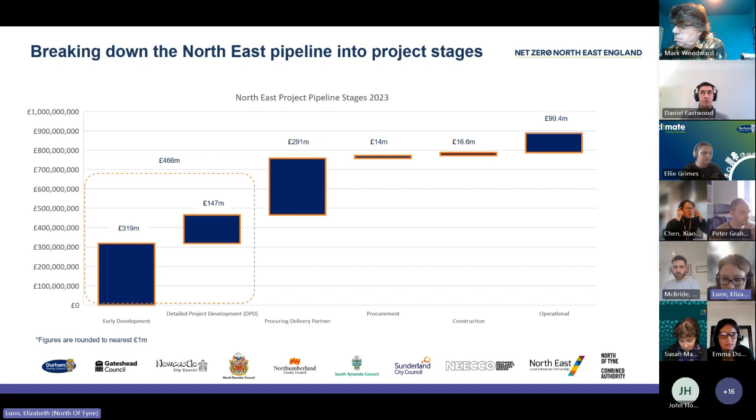I think I'll wrap up there because I'm aware we don't have much more time. But if you have any questions, I've kind of rattled through what's going on in heat networks in the North East or any of the hubs programmes - I would encourage you to get in touch. So without further ado, I will pass you on to Chris McBride, who's going to talk to you about the heat network zoning consultation. Thank you, Elizabeth.

I'm going to make an assumption that everyone on this call knows what we're talking about when we talk about heat networks, but zoning is the bit we need to fill the gaps in on. It's important to set the context: heating is responsible for about 20% of the UK's greenhouse gas emissions. Meeting our legally binding net zero targets will require decarbonising virtually all heat in buildings, so it's something everyone is going to need to consider at one point or another. Heat networks are an essential part of delivering that, especially in urban areas, but not necessarily exclusively.

Zoning is one of the main levers we've got to accelerate the growth of heat networks. At the moment they probably provide about 3% of heat, and we want to get that up to about 20% in total.

But the first thing to say about zoning is that no one actually has to do anything now, with the exception of replying to the consultation if you have the time and would like to. Our ambition is to introduce zoning by 2025. This is about getting ready for zoning and thinking about what it might mean for you and your local organisations, authorities, neighbours, and organisations within your areas.

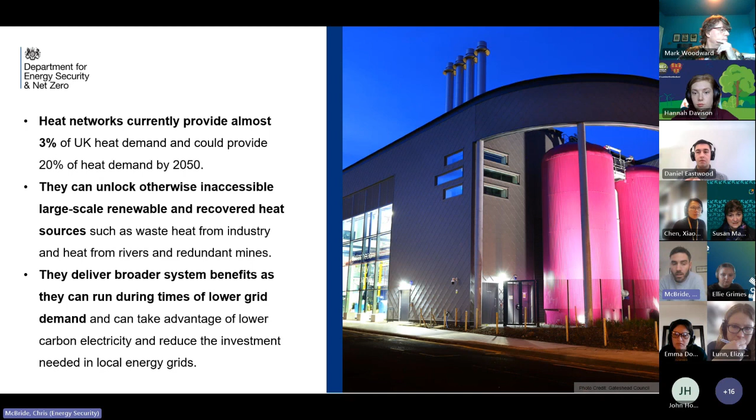Hopefully this provides a good introduction to what it is we're trying to do through zoning, but then also more specifically on the consultation, if there are things within the consultation that you would particularly like to respond to.

The thing to say about zoning is that it will transform how heat networks are developed in England - this is an England-only policy, which I guess is not of huge relevance to everyone on this call, but just to say, we're just talking about England, and the consultation is just relevant to England.

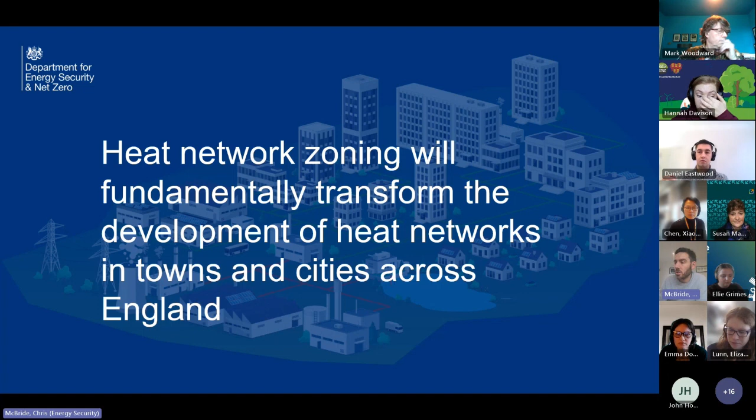Fundamentally, zoning aims to mitigate existing risks related to building and operating heat networks, and you can pretty much break those up into 3 boxes. The first one is it's difficult to make decisions about where to build heat networks in the first place.

So the aim of zoning is to designate areas where heat networks are expected to provide that lowest cost, low carbon heat. This provides everyone within that area much greater certainty that heat networks are the best choice for decarbonising heating there—whether you're a building owner within that zone, the local authority which the zone is within, or a developer looking to develop a zone. It's basically trying to give that much greater clarity to everyone involved.

Secondly, there's some uncertainty about the roles and responsibilities of different organisations in developing heat networks. Again, zoning aims to bring greater clarity on those roles and responsibilities, both at a national and a local level. Hopefully that can allow for better long-term planning, better coordination, and a faster rollout, and hopefully lower costs for everyone.

And then finally, there's uncertainty about whether buildings will actually connect to heat networks. You could design the most brilliantly connected heat network, mapped out in the most strategic way, but if there's uncertainty about whether buildings are actually going to connect or not, this can obviously hamper investment. It can mean that maybe the network isn't built out to that plan. So zoning can actually require certain types of buildings to connect to a heat network where it's cost effective for them to do so.

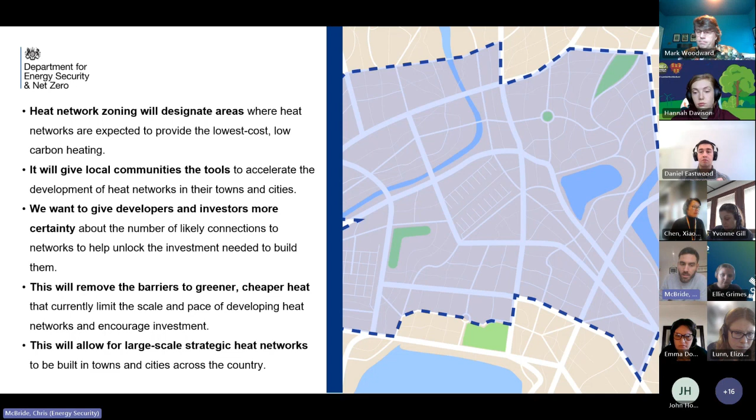And I'll go into this in more detail at the back end of the presentation. By requiring those connections, we're hoping it can help unlock scale and new opportunities, but also give that balance—as I said, it's about where it's cost effective for buildings to do so. So hopefully taken together, all of those things should help reduce the barriers that currently exist to developing heat networks.

So in terms of how we're delivering zoning, last year the Energy Bill became the Energy Act, and there were 2 big heat network measures within that bill. The first one was on consumer protection.

Through the Energy Act, Ofgem are going to be appointed as the heat network regulator, and from 2025 they're going to be able to step in on disproportionate pricing, bad customer service, and poor reliability. Last year we consulted on the finer detail of those proposals, and we'll be publishing our response to that later this year. So this is a whole new generation, essentially, of heat network regulation and consumer protection.

What we're currently consulting on is the finer detail of zoning. Zoning was the other thing that was in the Energy Act—that was the powers to make zoning a reality. This consultation is again about that finer detail: what does zoning actually look like in reality? And in terms of how it will be delivered on the ground, zoning is going to be overseen by 2 new types of bodies.

On one hand, there is some national coordination that is obviously required, so we're proposing the creation of a central authority that, to begin with, will be in the Department for Energy Security and Net Zero. But there will also be zone coordinators in different parts of the country who are basically taking forward that local delivery. I'm going to touch on that in slightly more detail, but this is really about trying to give local areas and local communities the power and the ability to make the decisions about what is right to be delivered in their areas.

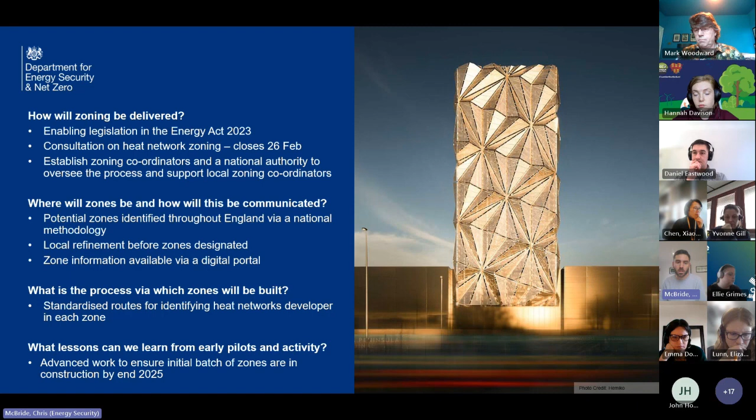As I said, it's indicative, it's not finalised, but hopefully it gives a decent idea of where we expect the zones to be. The final model, which we will release ahead of all the regulations going live, will go through an appropriate quality assurance process, because we want everyone to have confidence in this model and understand how it reaches its conclusions. So when it goes to the local refinement section, there's confidence in what it's doing, and that process can be as effective as possible.

So I mentioned the consultation. We're consulting right now on this finer detail. We consulted back in 2021, as people might remember if they were working on this then, and that was on the general principles of zoning that fed into what became the Energy Act.

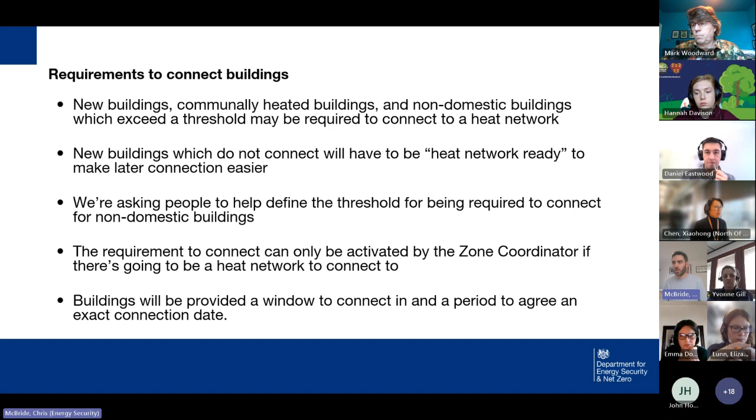So in the consultation, it sets out a timeline of when that requirement can be activated, what the process is then for negotiations between the buildings and the developer about the connection, and what the buffer period might be in which further information can be sought or an appeal might be set out. We want to make sure that's a process that works for everyone, and we're consulting on what that period should look like and how that connection date can be agreed.

Now, within this process, buildings can seek exemptions to connect. There are a number of different types of exemptions, and all exemptions will have an end date. They'll either be temporary, with a specified end date, or conditional, where the exemption exists until a condition changes.

These exemptions can be granted for either cost or timing reasons. For example, if the building owner deems that the connection is too expensive, that could be a potential exemption. If there is an existing contract in place that means the connection wouldn't work for timing reasons, that's another reason an exemption might be sought.

Some buildings might receive automatic exemptions from the central authority, and those are likely more than anything to be for national security reasons. All of the finer detail of the exemptions, which I don't necessarily have time to get into now, will be set out in the consultation.

I appreciate that was a very quick run through for what is quite a large topic with a lot of detail, but hopefully it sets the context for what we're trying to do through heat network zoning. I'd stress the consultation is live right now, and it closes on the 26th of February. If you would like to respond to it and you are able to, please do not feel you have to answer every single question in the consultation.

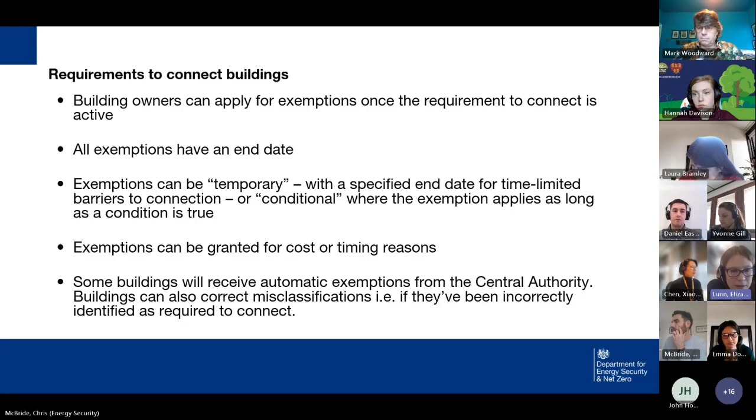Good morning, everyone. Thanks, Lizzie. I'm going to try presenting Teams if it will work. If not, we'll defer to not being able to see everyone. Let us know when they're coming through. Yeah, that's up now, Graham. Peter, sorry. Okay? Yeah, awesome. I made it so I can read them as well. Might help.

Yeah, so I'll skim through this because a lot of it's probably covered and people know. So heat network zones were announced to be delivered by 2025 in the Energy White Paper, and the primary legislation now exists within the Energy Act as of October last year, and secondary legislation is what we've just been talking about there for the consultation.

So the definition is basically the lowest cost means of providing decarbonised heat. And we've been one of 28 cities working with DESNZ and our appointed zoning technical consultants during 2022 and 2023, as various work packages were added onto that.

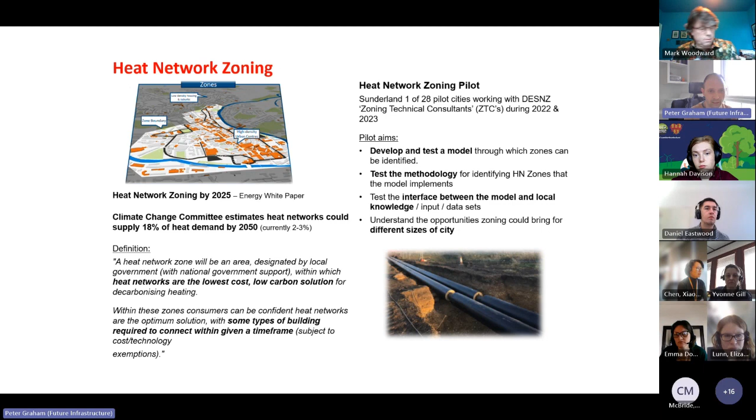And then using local authority knowledge to understand how areas might develop out, through development plans or anything like that, and use of buildings, because initial computer trawls might show up a large scale building as having a significant heat demand, where with local knowledge or use of that building, that might prove otherwise.

So our zoning technical consultants appointed by DESNZ was WSP. So they also were supporting us and continue to support us on Sunderland City Centre Heat Network, which is now known as Sunderland Central, as a result of the outputs through this work.

So they managed to support us in getting Green Heat Network Fund Transition Scheme funding for commercialisation and pilot boreholes. For various reasons I'm not going to go into, we still haven't drilled the boreholes, but most of that's just down to cost and the depth we're going to. But that's a work in progress, with discussions with DESNZ and various bits of market testing ongoing.

So the bit you're probably more interested in today is around the approach we took to the heat network zoning pilot. So the approach with WSP was very much a GIS model based approach. And as was just touched on earlier, it didn't just stop at the boundary.

We kind of did administrative boundary plus, because there are some development areas that would cut across that. And we've spoken to neighbouring local authorities, and they've had some insight as to what those zones might look like, where they're touching the boundaries.

So there was an initial THERMOS output, and the level which we drew for that was an assessment at 80 megawatt hours, just to give a little bit of leeway. What's been discussed within the zone is 100 megawatt hours plus would be the sort of mandated load for public sector buildings, any communal buildings, and then we also added in large scale development areas into that.

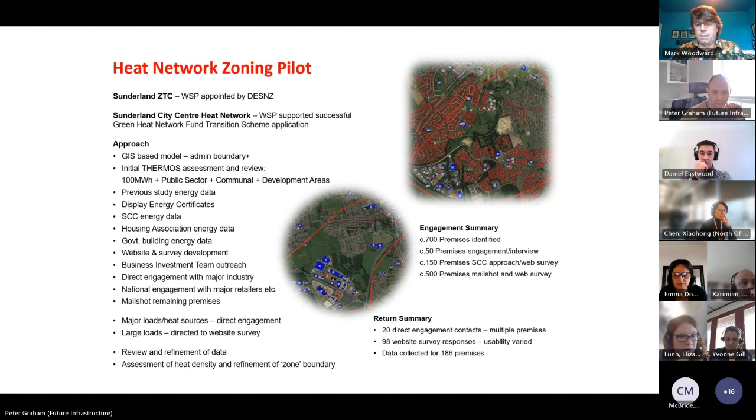In the output summary for Sunderland, we ended up with 16 individual identified zones, some of which could be combined across road networks. Around 630 mandated connections - I think all in, buildings if they were to connect covers around 17,000 individual buildings if they were looking to connect later. The loads speak for themselves, as do the CapEx figures, which obviously we wouldn't be able to deliver as a local authority - it definitely requires private investment to deliver at this scale.

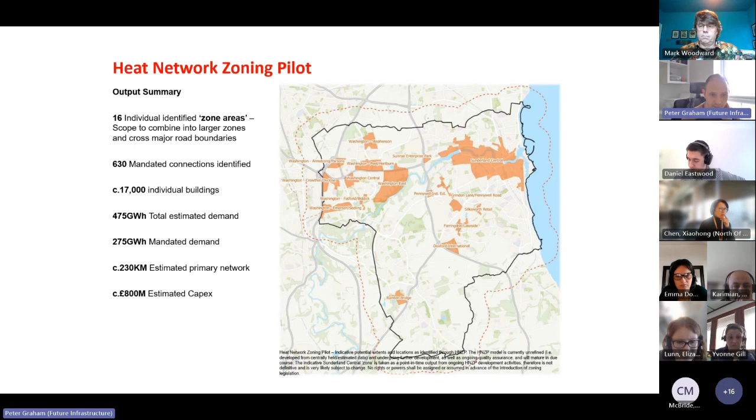What we are moving forward with is we're currently looking to market Sunderland Central as a zone ahead of zoning legislation coming in, for a network operator to come and work with us to commercialise that.

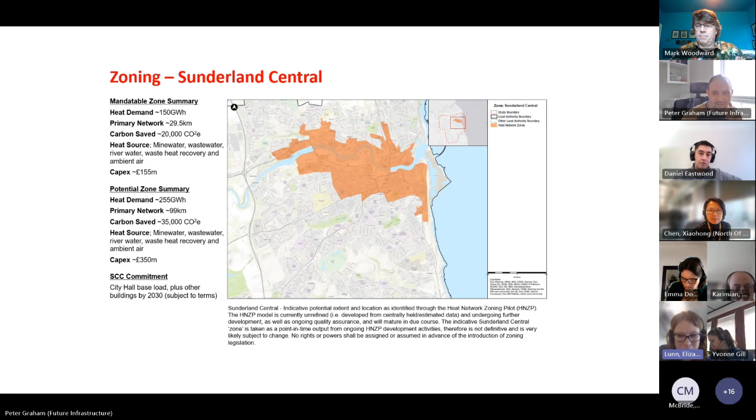So I'll leave it there for running out of time. That's great, so sorry Peter. No, that's all right. There's a lot - I think it's really interesting, and I think people will have lots of questions about it.

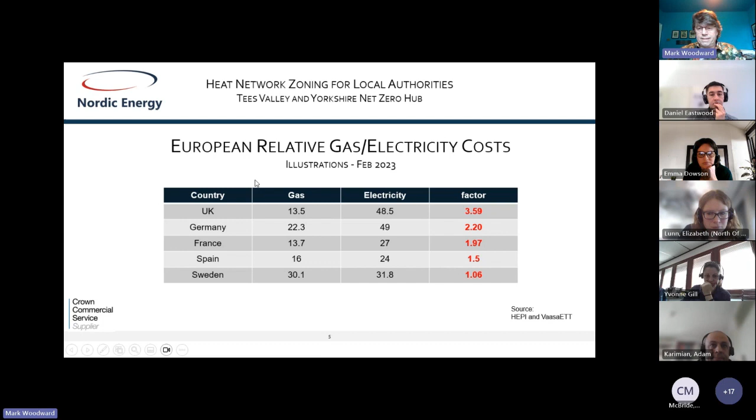And so when you're doing a business case, I've been doing this for a long time - any business case you look at, they say it doesn't work. So this is why mandation is so important, or 'required to connect' is the new terminology and so on.

As Chris has talked about, the government policy is moving in this direction. This is a revolutionary change - zoning. People are going to have to connect to a network. This is under a Tory government, remember, that is libertarian in its instincts. And it's moving in this direction.

The Energy Act itself covers an awful lot of territory, as well as heat network zoning - vitally important. The Energy Act went through Parliament, 3rd reading in September - Labour and Lib Dem did not oppose. There were 19 people who objected - John Redwood and people very much on the libertarian side of the Tories. Otherwise, the rest of the MPs. So this is not going to change with a change of government this year or beginning of next year. This is something for real because everyone's behind it.

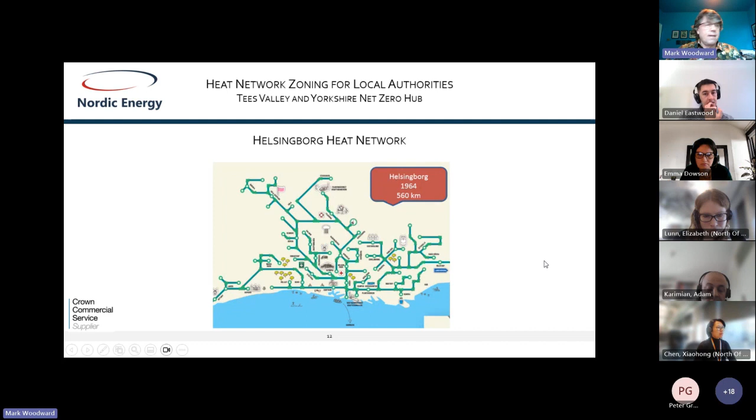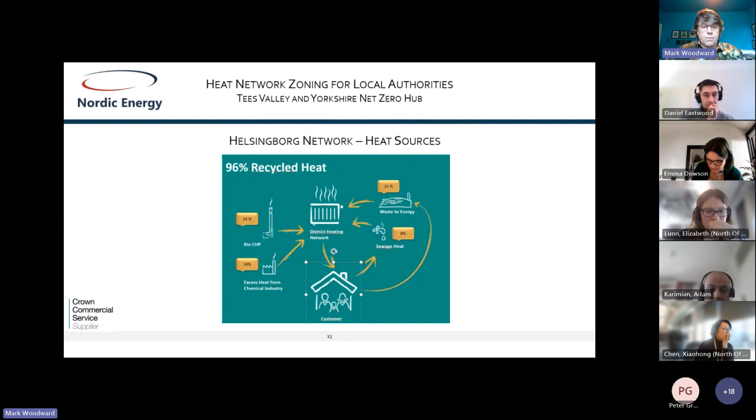I just wanted to do a little bit on what can be achieved, because this is not a fantasy land. In Helsingborg, their network is actually about 560 kilometers long now. It uses multiple sources of heat because all you're doing is circulating water pipes - you can make heat from anywhere. The biggest producer of heat for the network is Kemira, who makes sulfuric acid.

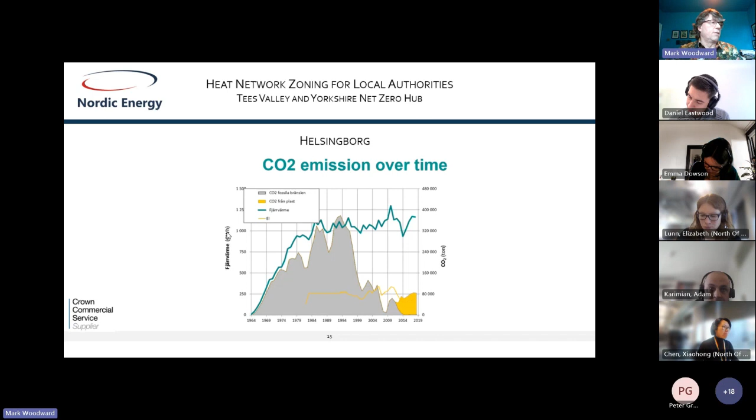If you look at our region, we make loads of stuff, and we're still manufacturing. We have lots of waste heat, we're not using it. And Helsingborg's decarbonised itself - it started this 20 years ago, 50 years ago, more than 50 years ago, at the last energy crisis. They were oil dependent, and they realised they were in a big hole because of it. We're in the same hole now, and that's what all this is about.

And from a public sector, particularly side, all those energy assets are owned by the municipality, and they built those up over the last 50 years.

It was actually offered to the market in 2019, because obviously you imagine a local authority with 1.15 billion's worth of assets that it's got to manage from an energy perspective. It makes them a bit scared. However, the community said, hold on a minute, we're not too sure about this. They had a referendum when more than 50% turned out, and 96.4% said no. Because their jobs depend upon the network, their jobs at Kemira, the sulfuric acid factory, and so on. If we're looking at it from an LA perspective, this is really important stuff in terms of economic growth, regeneration. It's not just about heat networks.

So yes, as Chris was talking about, that's where the current market position is, and that's the investment estimation coming in to achieve that. And we're seeing it happening. We're seeing it happening in Sheffield. A bit of a heads up on that.

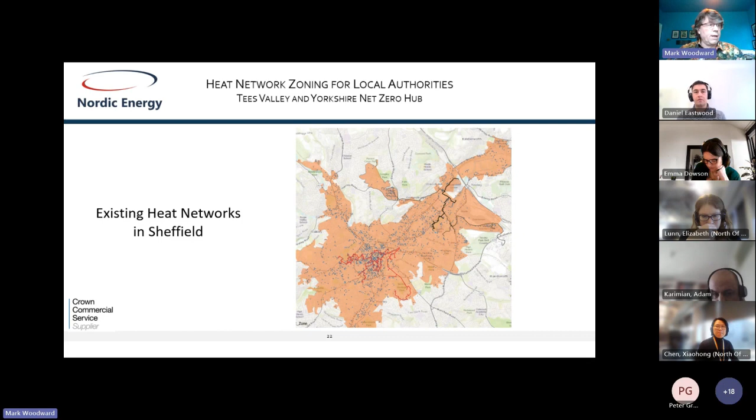We've actually, fortunately, got, rather like Sunderland, 2 networks in the city. The red one is from Veolia, started 70 years ago. The black one in the north is based at E.ON, different sources, but both have got expansion plans and potential for doing full-scale zoning, zone completing opportunities. And then heat supply, point I was just making.

And coming back to Helsingborg, little case study. Alfa Laval did the heat recovery work on Kemira. It cost 4 million, and they get 2 million worth of heat sales a year. That's a pretty simple payback situation, because this is not simple. Who's going to pay for the connection, who's going to put the heat exchangers in for the heat supply people, those opportunities? That's what the steel people say to me in Sheffield. Yeah, it's all very well, you know, Industrial Innovate UK and so on, things like that, Industrial Energy Transformation Fund.

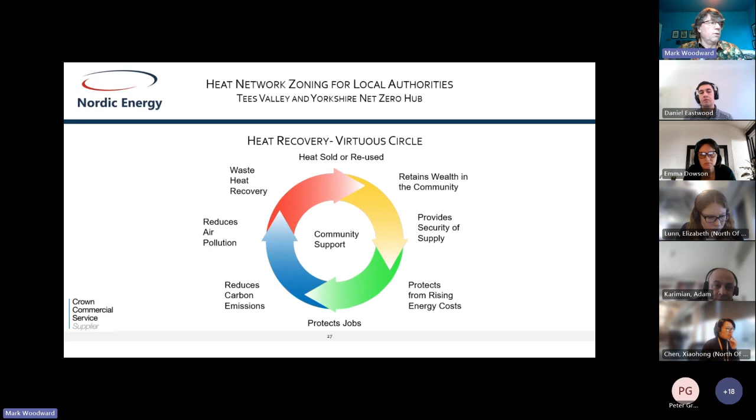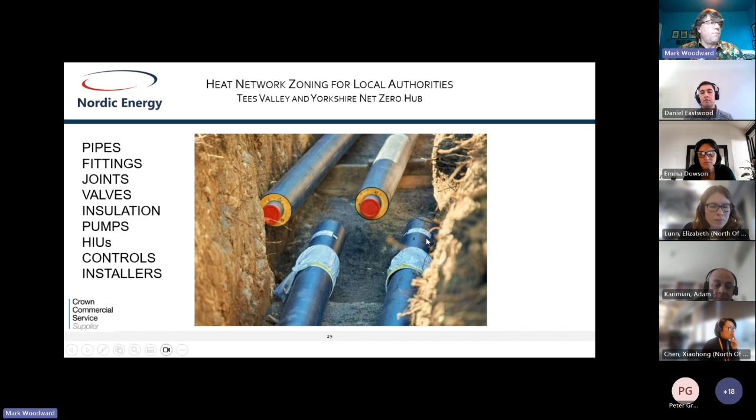But really, big expenditure, but look at the opportunity, and it's a virtuous circle, all of that. And then supply chain. Yeah, we make lots of stuff as well. We're not just sources of manufacturing, we make lots of stuff. What about the opportunity for integrating those?

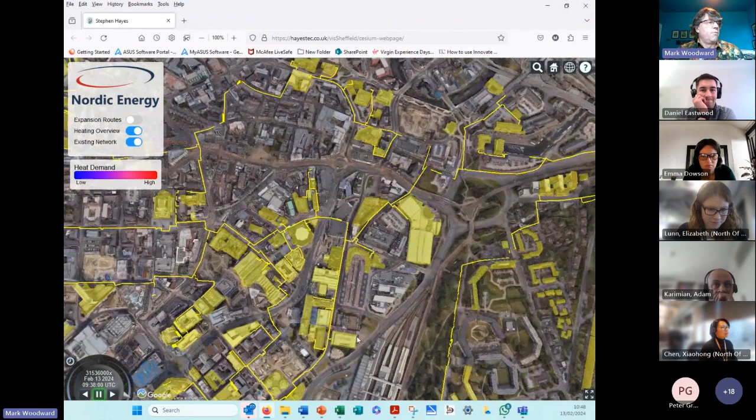We're doing city scale mapping as Nordic Energy. I'm just going to end the show and show you something quickly. This is a map, the visualization 3D interactive map of Sheffield, just coming back out. This is actually the Veolia network, so you can see the network pipes and the connections in there.

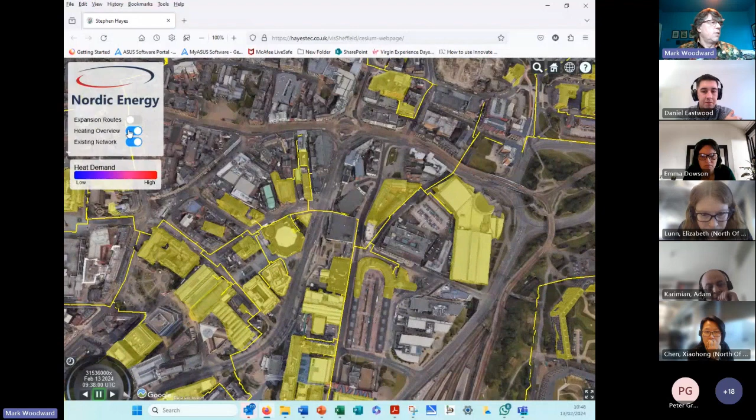And then if we whiz down and then I flick on the mandatable buildings, whoa, there they go. And then, of course, you can pivot this so that you can see the city. And what we've done is we've put estimated revenue values for all the mandatable buildings in Sheffield using our 3D interactive. This is bespoke, we're kind of leading the line a little bit on visualization work.

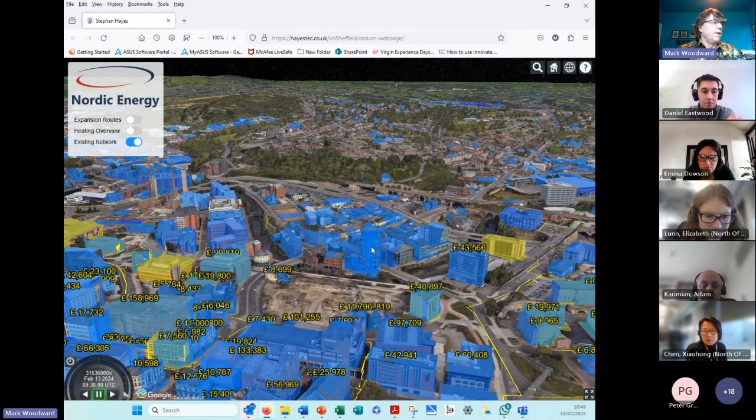So the department are pretty keen on what we're doing at the minute on this, because compared to a GIS map, it gives you a lot of extra information, and you can work across and just search across the city. It's a little slow on Teams, I'm afraid, but this is all web-based, so it's not special software or anything, piece of cake, you can sort of use it. So it gives you a chance to quickly see across what you're looking at.

There's a new development there, that's West Bar, and you can see there, well, they've actually got to the top of those towers there. There's the lift towers, and that's on its way to being developed. So a little bit of a heads up on the reality of what can be achieved, and the background and why I'm so enthusiastic about it.

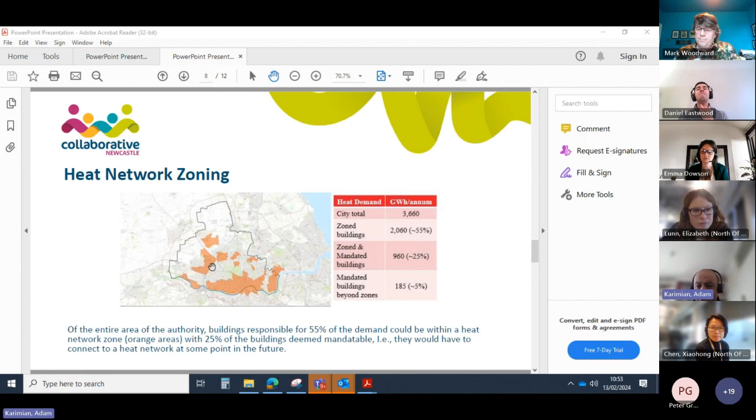How are we going to deliver it? Obviously, Newcastle City Council is the linchpin of it all. We are the nexus - we fulfil so many functions. We're obviously a major landowner, we have strong relationships with other institutions, we're an anchor load customer ourselves, we've got a huge public building estate, and obviously we play a huge role in planning policy and enforcement.

One unique thing with Newcastle City Council is our delivery mechanism for heat networks and how we actually deliver these things. There's a thing called the Regenerate Partnership, which is a joint venture, a public-private partnership between Newcastle City Council and what was then Equans Urban Energy. They've now changed name - they're going to be called Bring Energy, so they keep changing their name. The new owners have settled on the new name Bring Energy. So if you hear the name Bring, it's actually Equans, and we are in a partnership with Equans called the Regenerate Partnership. It's a public-private partnership, and essentially Equans deliver our decarbonisation projects, and we're in agreement now for a 40-year period, up to a total value of 500 million.

There's some positives to this relationship because it means we don't have to attract a private developer to the city - we've got Equans in place. Equans don't have a monopoly over the city at all, but what they do have is the right of first refusal for projects that we initiate.

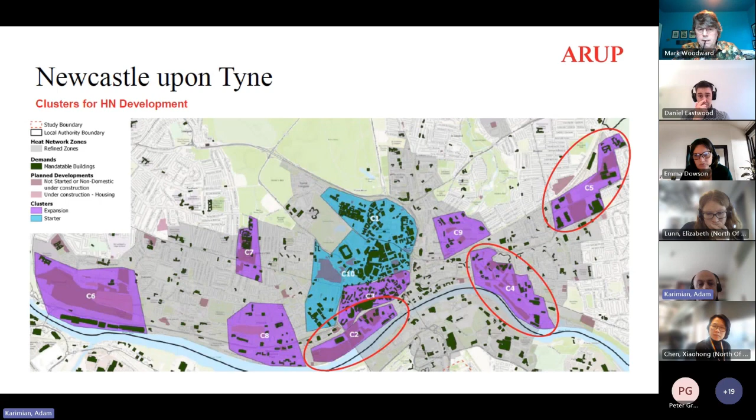Out of the three that were put forward as part of the Newcastle schemes, C2 was selected, which is called the Forth Yards project.

This shows you in greater detail the work that Arup have done. They've done some outline techno-economic modelling to date. Some of these figures are admittedly going to be heavily caveated because there were a lot of assumptions made in the modelling across the pilot scheme.

So on Forth Yards in particular, we're looking to install low carbon plant, and this is the River Tyne here. The idea is to install a river source heat pump and extract energy from the river to an energy centre in the Forth Yards development.

This shows you the west to east spine, so the main pipework route. This area here is actually existing buildings, so they've modelled a planned development. Forth Yards isn't built yet - it's a new development. But this cluster here is existing buildings that would be deemed connectable under mandation. So they've modelled guaranteed loads, but also potential future loads as well.